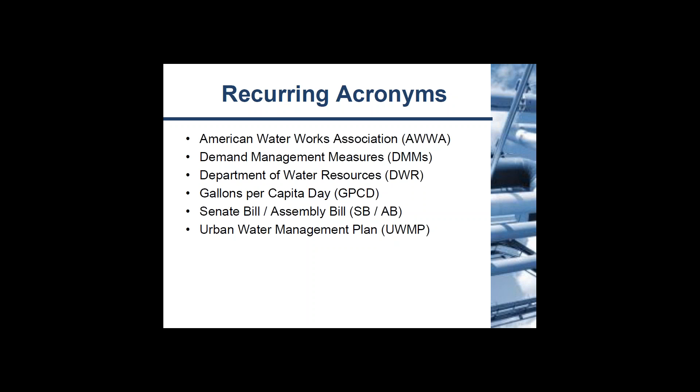In this presentation, we'll first go over the general applicability of UWMPs. Then we'll go over the changes since 2010. Mostly, we'll go over demand management DMMs, system water losses, and some optional elements. We will then follow up with the anticipated timeline, and then we'll go into Q&A.

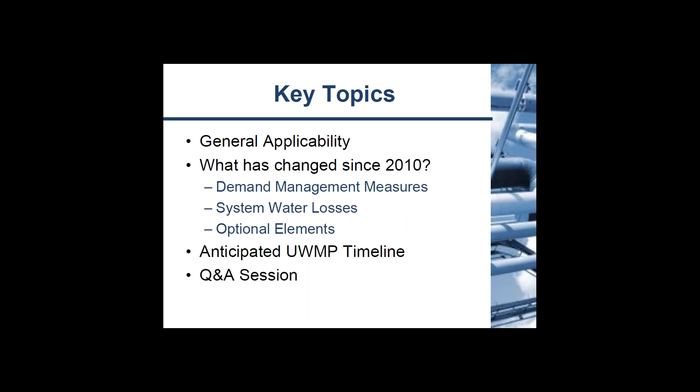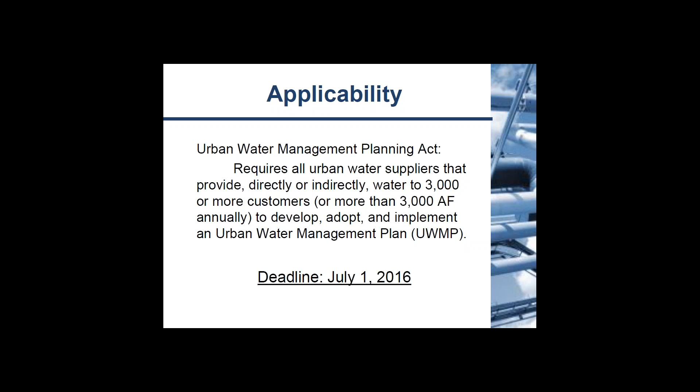Main applicability. The main goal of the UWMPs is to accomplish water supply planning over a 20-year period in 5-year increments, which is why the UWMPs need to be updated every 5 years. Who is required to submit a UWMP is all water suppliers that provide directly or indirectly water to 3,000 or more customers as direct customers, or provide more than 3,000 acre-feet annually, to develop, adopt, and implement an urban water management plan. There are some differences between people providing 3,000 acre-feet of water and people providing directly to the customers, in the regulations and what needs to be done.

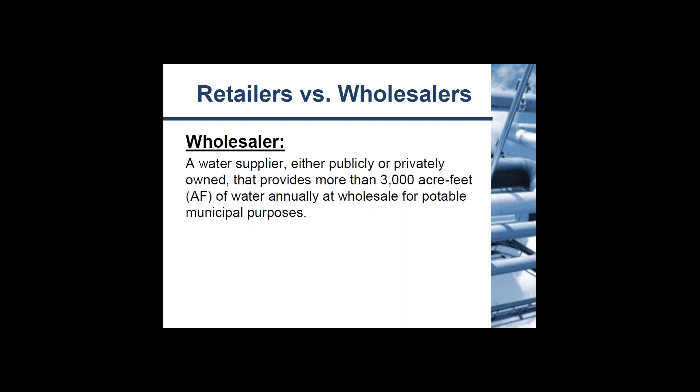There are differences between retailers and wholesalers. A wholesaler is the water supplier, either publicly or privately, that provides more than 3,000 acre-feet of water to wholesale for potable municipal purposes, so they could be providing to the retailers. The retailers provide that water to the end users. The end users can be anything from industrial buildings, landscape, households - anything that water goes to that can be a retailer. As long as they provide to more than 3,000 end users, then they are required to submit a UWMP.

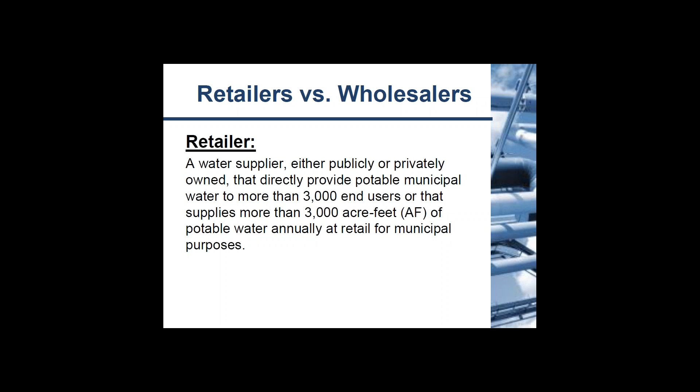The requirements for the new guidebooks are slightly different than 2010 for retailers and wholesalers, and we'll go over more regarding that in a little bit.

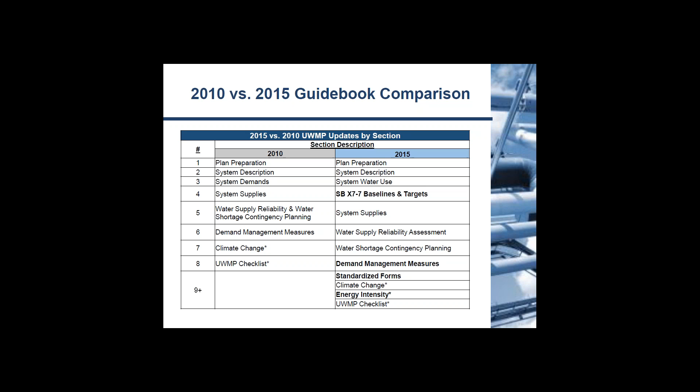Now, what have the changes been since 2010? There have been three main bills that have been introduced. In our February 2015 webinar, we talked more in detail about all the different elements for these three bills - the Assembly bill and the two Senate bills. In this webinar, we'll mostly discuss the changes to the DMMs for Assembly Bill 2067, and then the distribution system water loss requirements for Senate Bill 1420.

If you were not aware, there is a new revised UWMP due date of July 1st, 2016 to account for the late release of the guidebook.

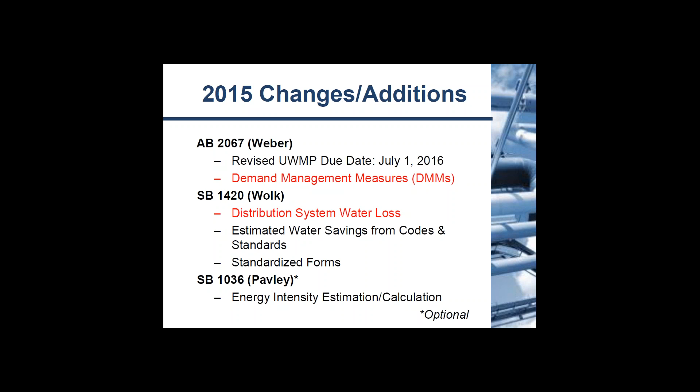Moving on, let's talk about demand management measures. Now, in the 2010 regulations, the description of what was required for DMMs was very brief and very open-ended, with more open quote description of each water DMM that is currently being implemented or scheduled for implementation. That is the only thing that the supplier was required to provide.

Now for 2015 regulations, the description is a little bit more comprehensive, and effectively the number of DMMs have been reduced from 14 to 7. Now this does not mean that there's less content that needs to be performed. It just means that they have condensed the 14 DMMs into 7.

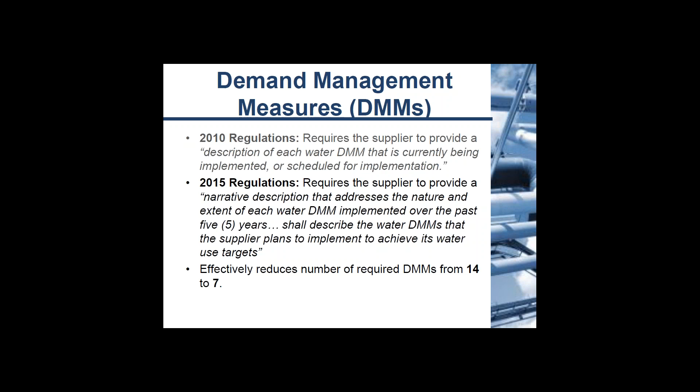For 2015, you're required to provide a narrative description that addresses the nature and extent of each water DMM implemented over the past 5 years, and shall describe the water DMMs that the supplier plans to implement to achieve its water use targets. Now, what does this mean? Let's go over this more in detail.

Now, the nature of the DMM program - you need to describe what the DMM program will do. For example, describe the dollar value for individual toilet replacements, if that is one of your programs, or what's the content of a school education program.

Furthermore, you also have to explain the extent, then quantify the implementation of the DMM. For example, for the school program, how many schools has this presentation been given to, how many children have been reached. Also, for the toilet replacement program, the number of customers that have used the toilet rebate program, and so on and so forth.

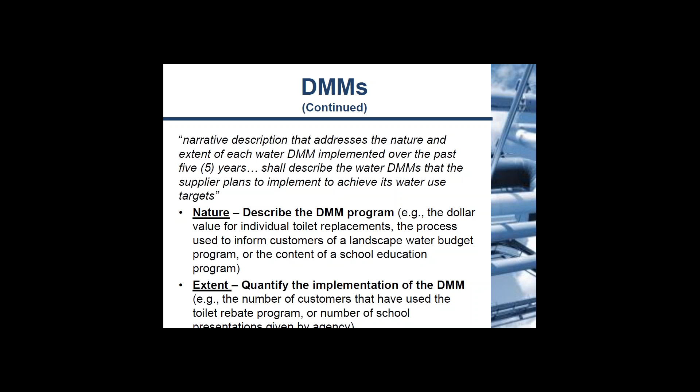Now this is the list of the DMMs in 2015 versus 2010. As you can tell, it has been reduced. The number of DMMs may look smaller, but that does not mean it's less work. For example, if you look at subsections G and H of 2010 and subsection 4 of 2015, you can see that it's pretty much the same thing, only in a condensed form.

For the public information programs, the school education programs are now bunched together into the public education and outreach program. But many of the DMMs remain similar in nature, though many have been consolidated.

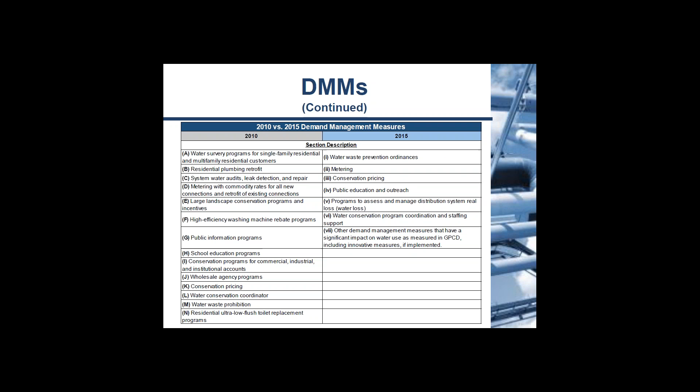Now, the differences required between urban retail water suppliers and wholesale water suppliers: all 7 new DMMs are required for retail water suppliers. However, that number drops down to 4 for the wholesale water suppliers, plus 2 other supplementary elements that wholesale water suppliers have to comply with. We can go into this in more detail if you'd like later.

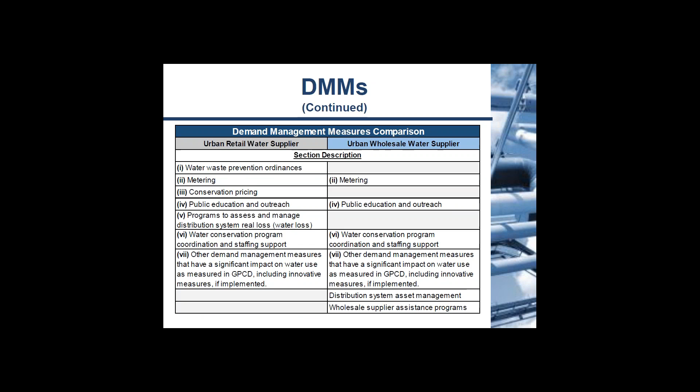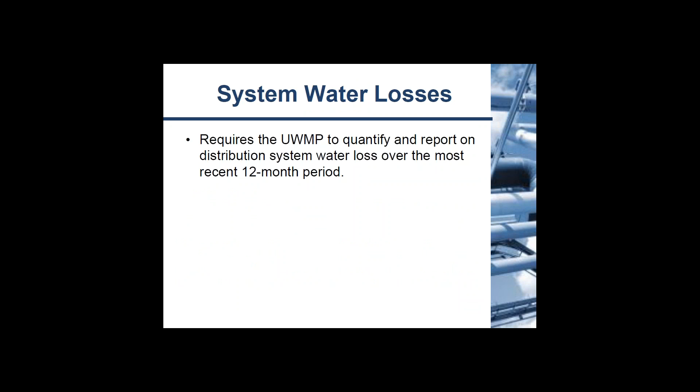Now let's go into system water losses. This amendment stems from the lack of knowledge regarding leaks within a water distribution system. It requires the UWMP to quantify and report on distribution system water loss over the most recent 12-month period. Now, the way that this is done is through the water audit method by the AWWA, found in Appendix L of the DWR guidebook.

If you actually go on the awwa.org website, there is an Excel spreadsheet program that you can use as a nice little guide to the audit process. As a matter of fact, that spreadsheet will actually spit out all the information that you need, and I will go over that in a little bit. Now, you must submit an electronic copy of the audit to the DWR using the DWR's online submittal tool, and both the retail and wholesale agencies are required to fulfill the requirements of this section.

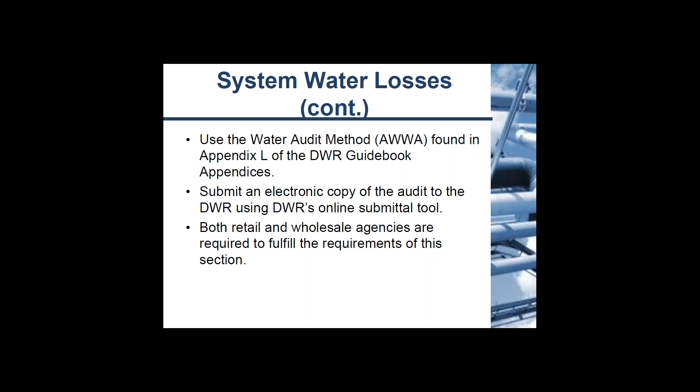Now, system water losses. These are high-level audit questions. Now, these are not necessarily the questions you need to ask during the audit, but these are the answers that you need to have. How much water has entered the system?

How much water was used? For what purposes did you use that water? How much was lost? What are the types of water loss that occurred? Some may be administrative, just on paper, or some may be real losses through leaks. What was the financial cost of the water losses? And then what was the volume of non-revenue water, and the financial cost of non-revenue water?

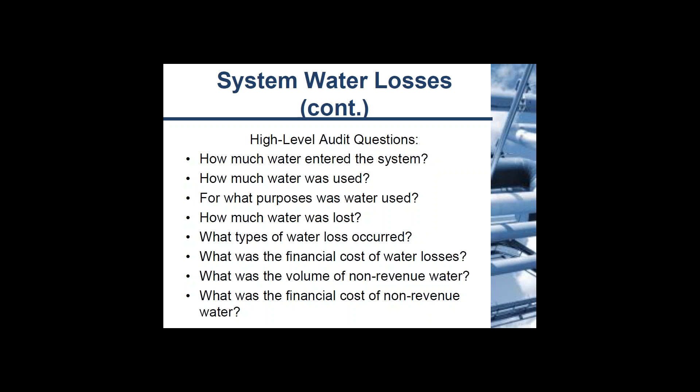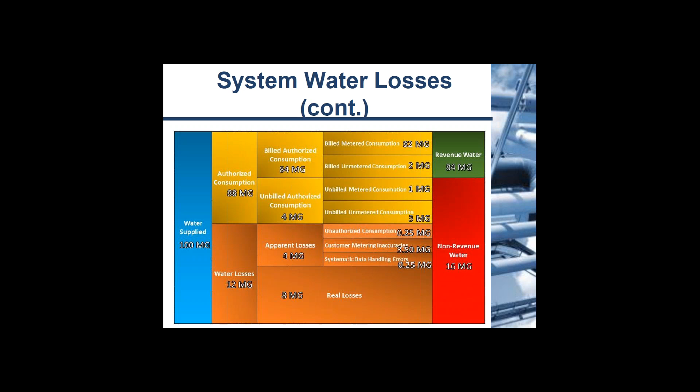Now, as I explained, the volume of deduction from the water balance is our volume of water losses, which is the difference between the water supplied into the system and the authorized consumption. The volume of apparent losses are paper losses. These are losses that are not physical in the system. They can be due to errors in the system, metering errors, or data handling errors. The volume of real losses is physical leakage, and the volume of non-revenue water is the water that fails to generate revenue to the utility.

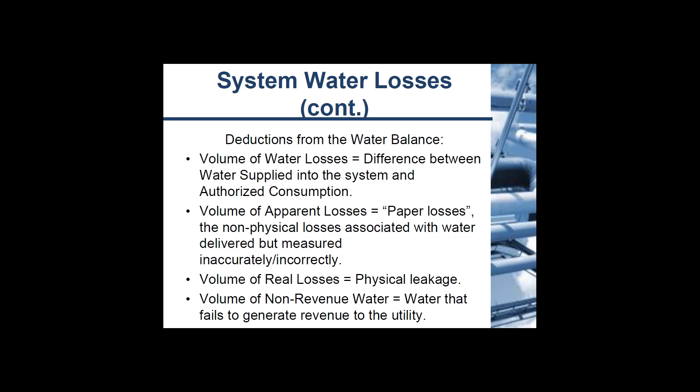Now, who should be the person to conduct this water audit? Now, this should be a dedicated person who is responsible for the completion of the water audit. Should be someone who has a general understanding of how the utility operates, is able to work with the appropriate people from all relevant departments to gather all the necessary data and information, and then has basic proficiency with Microsoft Excel and data management.

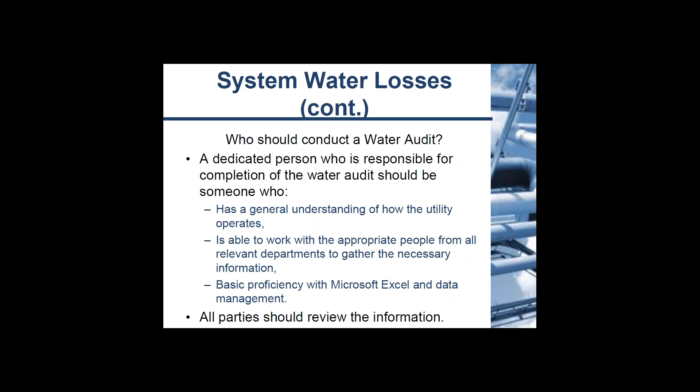As I said, the AWWA will provide you with the worksheet and all the audit documentation you need. It just needs to be filled out by someone that has a general understanding of how the utility operates and can use Excel. Now, this is an overview of the AWWA water audit software. You will need to register on the AWWA website before you can get to this spreadsheet. However, it's highly recommended that the spreadsheet be used. It is very helpful.

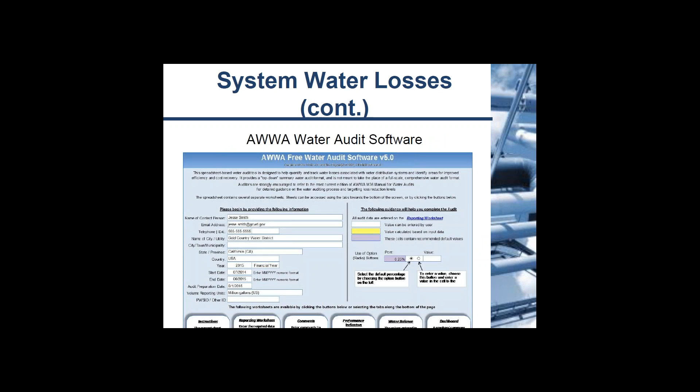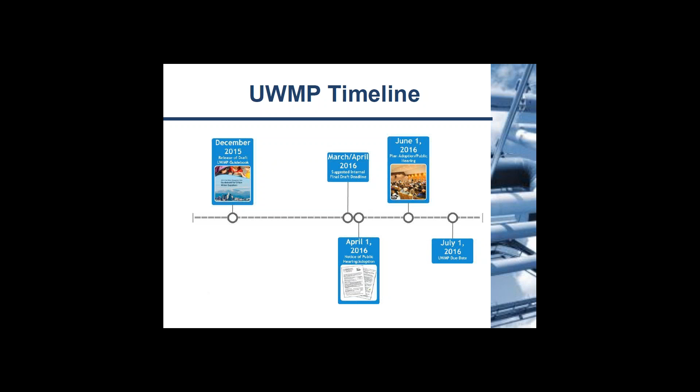In here from Colin Schultz at RMP: what happens if you miss the deadline of the UWMP of July 1st, 2016? If you miss the July 1st deadline, the one biggest issue you might have is you might be ineligible for any future grants or loans by the state, which could affect your overall deadlines of 2020, reduction of 20% by 2020. And that is the biggest issue you might come into by missing the July 1st deadline.